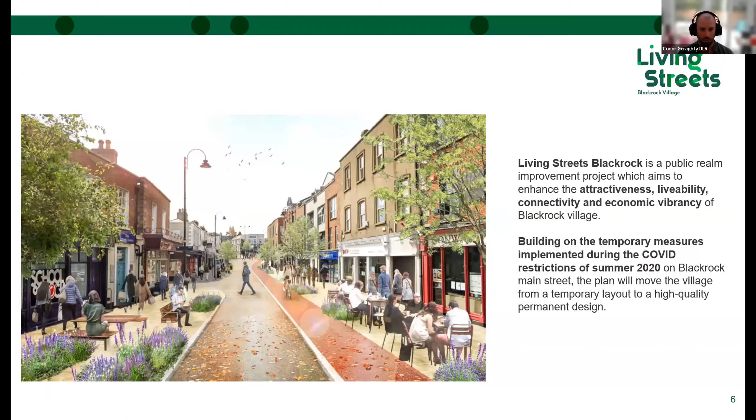This scheme involves a number of different elements. There are public realm improvements which incorporate better landscaping, more planting, and seating throughout the town, not only along the main street but out into the wider area as far as Frascati Road and down towards Newtown Avenue. It's hoped this will create a safe, accessible and attractive environment that will help maintain and boost the economic vibrancy of the town.

We hope to expand the mobility options for the town. While Blackrock is already quite easy to cycle to, we want to further expand the network and connect into the coastal route with a new facility along the old main street, improving walkability and accessibility in the town.

With the response to COVID measures, there have been a number of step changes across the town, and this scheme is looking to regularize that and bring consistency across the town, creating a high quality area.

As mentioned, connecting spaces is important to the project, particularly with the discussions around the seafront and existing projects in the area. We're trying to connect all of these spaces, and this project lies in the middle of all of these schemes, so it's important that we consider that at this point.

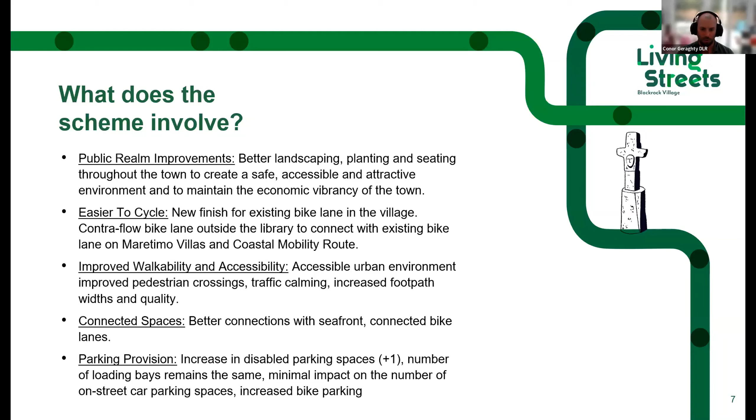Provision for parking is obviously important. There is an increase in disabled parking spaces in the town, and the number of loading bays remains the same. There is a loss of parking, but it's minimal in comparison to the amount of additional features included in the scheme.

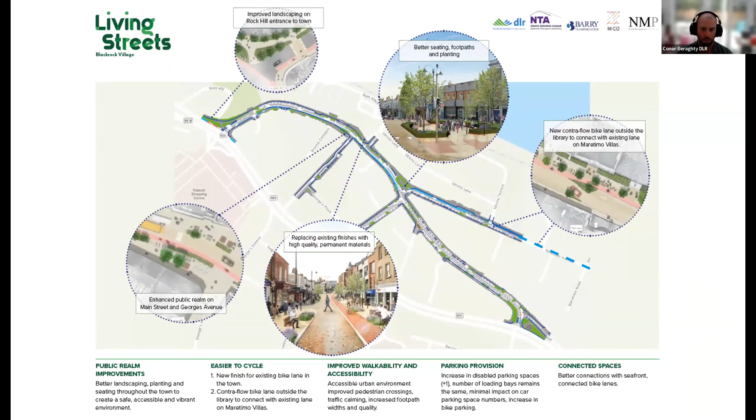On the right hand side, the continuation of the contraflow facility completes the link and connection to the coastal mobility route. The two images at the bottom are some representations, and John will go through these in more detail shortly.

The benefits to the scheme, which I've covered already, include improved walkability and accessibility, making it easier to get to the town by sustainable travel modes, connecting spaces, improving the green in the town and landscaping in line with our climate change objectives, and enhancing community well-being as well as the vibrancy of the town.

In terms of the history of the scheme, there's a strong policy basis as far back as 2015 when the local area plan was adopted. Even then, that plan identified the need for streetscape upgrades, active travel mobility, and enhanced connectivity.

The first step on this journey was rolled out during 2020 in response to COVID. One of the most significant changes was making the street one way, which freed up space to provide other measures like the contraflow cycle facility and increased planting. This was developed in consultation and co-designed with BBN and BVRAG at the time.

In 2021, TU Dublin carried out an independent evaluation of the Blackrock scheme to assess whether the measures put in during COVID had a positive impact on the village, and if so, what should be done next. That evaluation established that the scheme was positive and should be retained but built on, and that's what we've been working on through 2022 and so far in 2023.

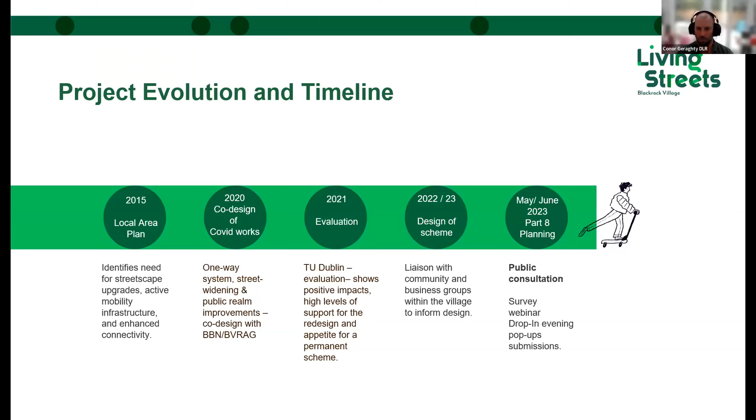At the moment we are in a public consultation process under the statutory Part 8. This webinar forms part of that engagement process, and the next steps would be to report back on the consultation for a decision to be made by the elected members.

Within the existing local area plan, there was a need identified to upgrade the public realm on the main street to provide a more attractive streetscape and an improved pedestrian environment, and this project seeks to achieve that.

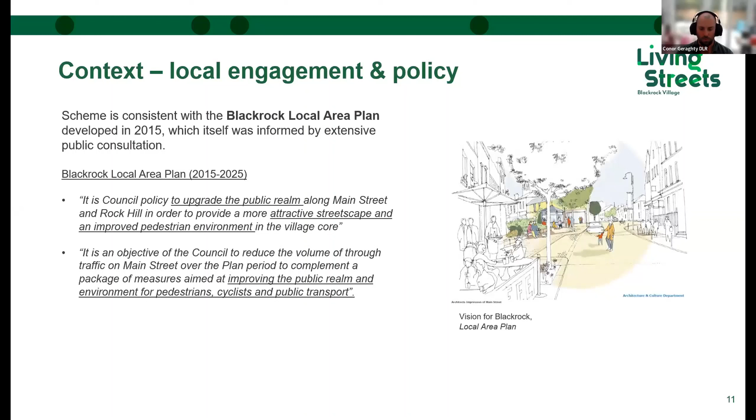It was also an objective to reduce the volume of through traffic, and the measures provided during COVID achieved that. There are a number of other projects in the area, the seafront project and Bus Connects, which sit either side of or through this project. As part of our scheme, it was important from the outset to make sure these schemes could all work together, in particular the need to move the bus terminus from the existing space near the seafront to progress the seafront project.

As part of this scheme, we successfully negotiated an alternative space for the bus layover facilities. While we don't need to move the buses at this stage, having that agreement with the NTA facilitates the progression of the seafront project.

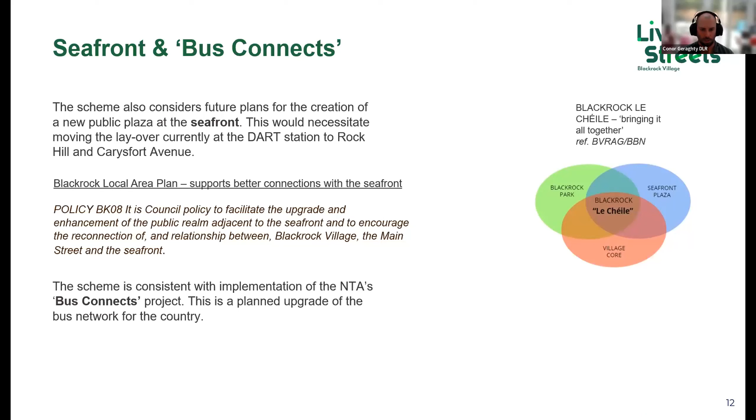The Bus Connects scheme generally has two parts. There's the change of services, the numbering and frequency of buses, which is facilitated within this project. Then there's the wider Bus Connects scheme, currently with An Bord Pleanála, which deals with the Rock Road down as far as Merrion Gates. This project aligns with that scheme as well, and the three projects work well together.

The TU Dublin report assessed the measures put in during COVID. The highlight findings were that 84% of residents surveyed believe the main street was good for the village, and 72% of businesses would like to see the changes made permanent. We took that support as a mandate to prepare the Part 8 for this scheme.

43% of those surveyed would like to see some design changes, and the recommendations from that report have been incorporated into this scheme. Loading and deliveries are a key issue for businesses, and during our discussions we've been mindful to incorporate those needs as part of this project.

Before the Part 8 was proposed, we had a number of workshops, both internally in Dún Laoghaire and externally with the National Transport Authority, who are the lead authority in relation to bus routing. We also met with the Blackrock Business Network and the Blackrock Village Rejuvenation Action Group, discussing what they need or would like to see in the village, as well as the schemes in the wider area and these objectives and needs.

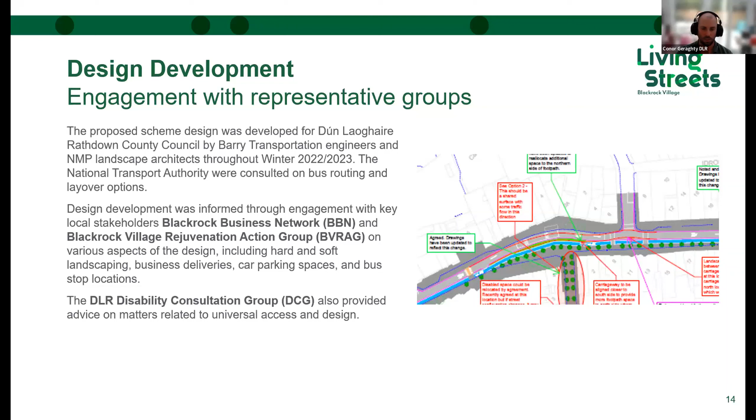We've tried to respond to these as best as we can within this Part 8. We also met with the DLR Disability Consultation Group to talk about matters relating to universal design and accessibility, and needs for those with disabilities within the village.

At this point, I'm going to hand over to John Montgomery, who's the lead landscape architect for the project, and he's going to talk through some of the design features of this scheme.

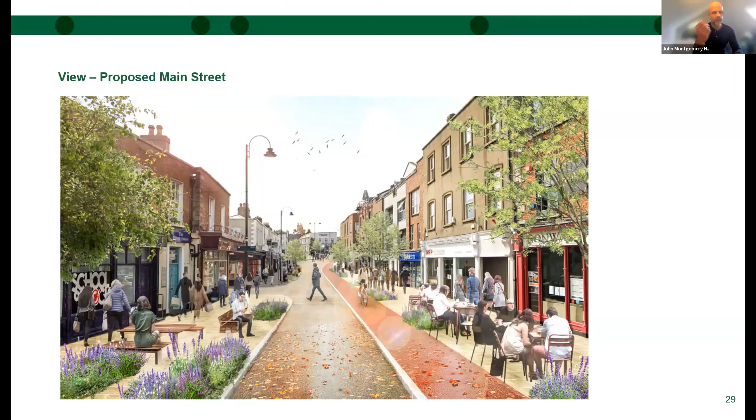We're really utilizing opportunities for providing planting in the streetscape itself, which will soften up the spaces a lot more throughout the year. You can see from the visual that it's much softer, less gray in the street, more green evergreen planting to complement and give structure to the herbaceous perennials we're mixing in, which will also help with pollinator plants selected for the scheme. That's just a plan view of how that works.

Currently there are 2 car parking spaces in this zone, and what we've done is realign the road to create more space. This is the zone just outside the parlour on both sides of the road, really taking advantage of the sun and aspect here. There's provision of bike parking, which is currently there, plus additional bike parking for cargo bikes, and we're protecting these edges using planting in the landscape—so it's a very functional tool as well as an aesthetic driver.

The loose seating is indicative and will require further thought on how it gets laid out and agreed. Again, the detailed plans are available to be viewed.

The space outside the bank itself is currently very well used, with seating and planting there. What we're doing here is celebrating that square and allowing for flexibility, while being conscious of creating a space that's well protected from the road itself, still provides a focal point within the village, and has seating around the edges that gets utilized as well.

We've allowed for clear width and access along the side, so people can move around the edge of the space if they don't want to go through or permeate it—based on feedback from various user groups. There's additional bike parking along the edge of the path, and we still maintain clear widths adequate for wheelchair users, buggies, and less able-bodied people to move through the space.

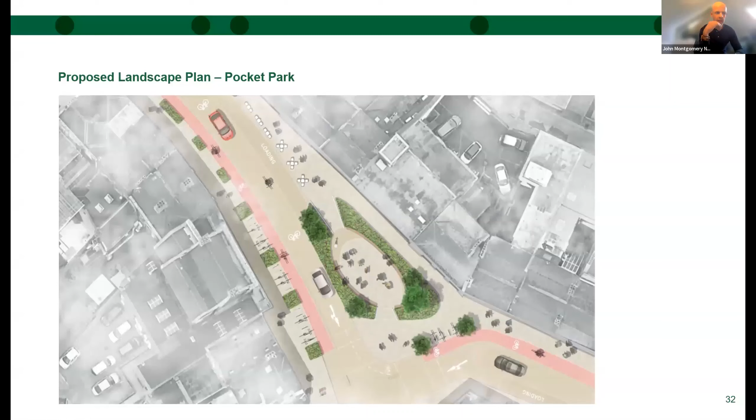In addition, the space is approximately similar in area to what it is currently. We're retaining the stone cross as well, trying to create a space that's safe and away from the noise of the actual street itself.

The visual I'm showing still needs a bit more work, but there have been comments about the existing trees—trying to retain the existing birch trees, as well as the clipped hedge close to the edge. These are details that will flesh out as we progress with the scheme. But the design intent is clear: creating a space that's a bit lower down, away from the traffic, feels enclosed and safe, playing a different role in that sensory experience of the landscape.

You still have controlled crossings through the space to link you beyond, really celebrating the idea of planting and the existing trees there, which tie in with the buildings.

The final space we'll look at is outside the library itself. Again, understanding how the space is used at the moment, and trying to utilize those spaces as a catalyst for that vibrancy we were talking about. This includes celebrating the entrances into the library, utilizing some of the space directly outside with soft landscaping.

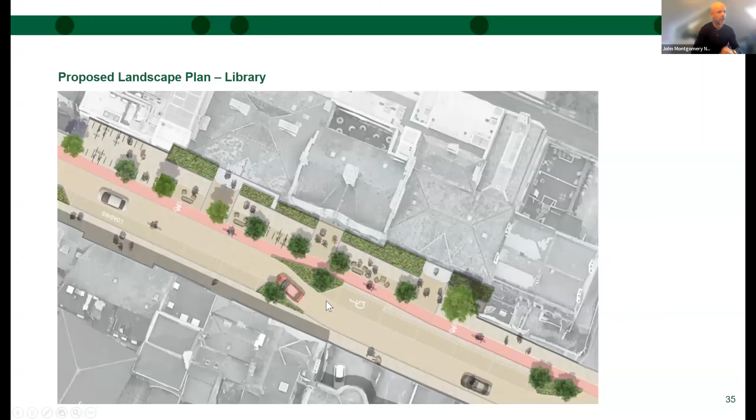This gives a better interface between the ground plane and the library building itself. There are opportunities for seating within some zones, still providing a safe transition through the space for pedestrians - a transition zone, static zones, and integrating the bike path. We'll still retain the car park spaces outside the library and mobility impaired spaces also. And again, the detailed plans can be referred to.

In terms of details, typically we'll be looking at natural stone, a very warm granite paving, very similar to what's been put in Monkstown and also along the metals in Dún Laoghaire. So it's the same suite of materials that we're using.

We'll be looking to detail the cycle path itself. In some instances it's flush, which helps slow down bicycle traffic. In other instances we keep it away from the actual road in both scenarios, giving greater safety to cyclists, particularly those traveling with young children. The high friction surface will be utilized on the bike track itself as a red color.

We'll also be using a high friction surface through the village for a portion to help with that sense of a shared space, but also to provide a much warmer feel than the blacktop currently there. We have an edge to the buildings which will help tie in those difficult nooks and crannies using smaller, darker paving setts, which also helps pick up or screen against any dirt.

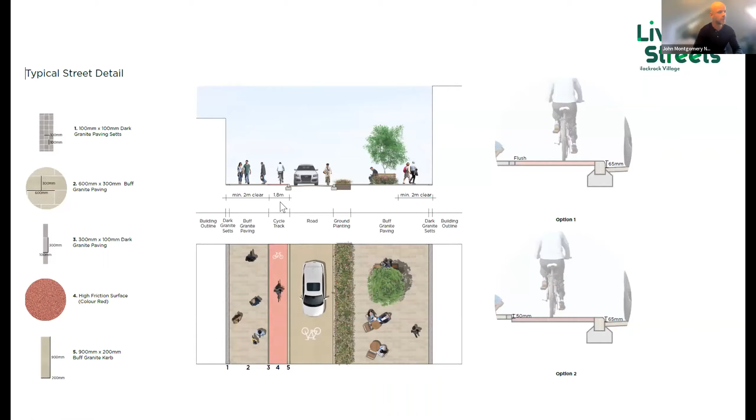This is just a little more detail on those actual materials, so you can see that kind of warmth coming through the granite. It's very durable, and it's been well tested elsewhere as well.

There's been questions about the edges of the planted areas - can they be slightly raised? In some opportunities we will be able to use raised planters, like in Monkstown and across the metals. In other areas, where we're trying to encourage water into the planted areas to use them as filter systems, we'll use lower kerbs with holes in them to allow that process to occur naturally.

For benches, we'll be looking at something more in keeping with what's been very successful in other schemes throughout the county. And obviously bike stands and the opportunity for an outdoor drinking water fountain.

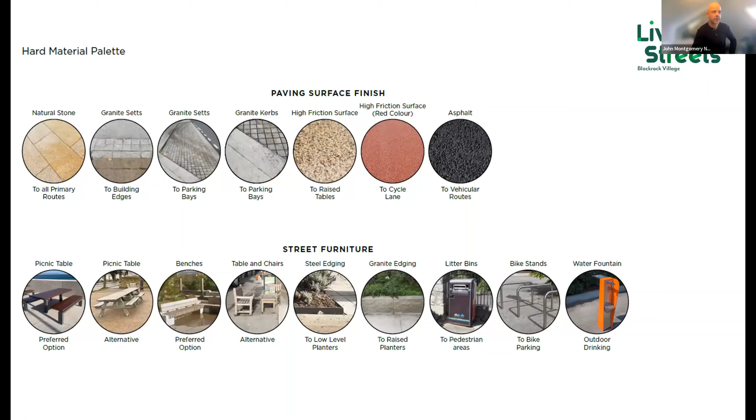In terms of the palette of materials for soft landscape, we'll really be looking to utilize native plant species, both in the trees and also with the selected shrub planting in the lower areas of the planters.

For bike parking, as we touched on previously, the preference is for Sheffield stands. Obviously there's issues with lower bike stands and the damage they do. But in total, we're exceeding what's currently in place, which will help encourage people to cycle to Blackrock and lock their bike safely.

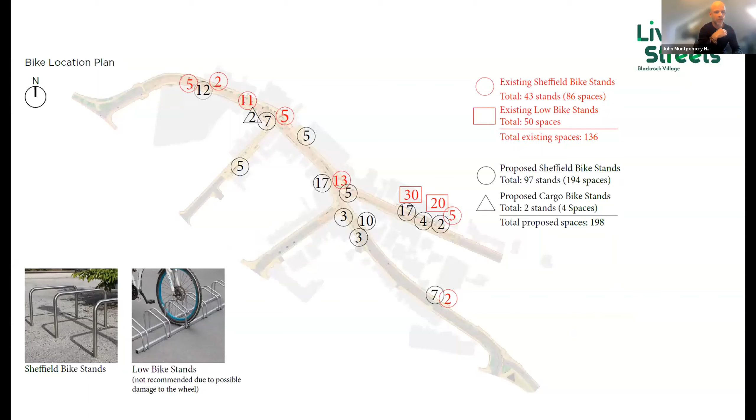Bike parking has been distributed in higher concentrations in certain areas where people are using it more, and lower concentrations in other areas, but always trying to ensure it's surveilled and safe for people to lock bikes to.

So in summarizing some of those elements, we've had good engagement with some of the user groups. We're looking to reduce clutter and obstacles, such as A-boards and signage, avoiding unnecessary regulatory or informational signage. There will be defined areas for retailers' furniture like tables and chairs, so they can be kept neatly out of the way without creating obstacles or zigzagging points for many users, including people with buggies and wheelchairs.

The opportunity for tapping lines for visually impaired, contrasting materials at thresholds, be it curb lines, crossing points for tactile paving, or actual thresholds into buildings. Looking to incorporate additional drop kerbs, again for the mobility impaired but also for other users. Smooth and clean non-slip surfaces, so all of the surfaces we'll be specifying will be aligned with the various different standards we're required to meet. Again, tactile contrasting paving at crossing points, and then the disabled spaces which will be retained.

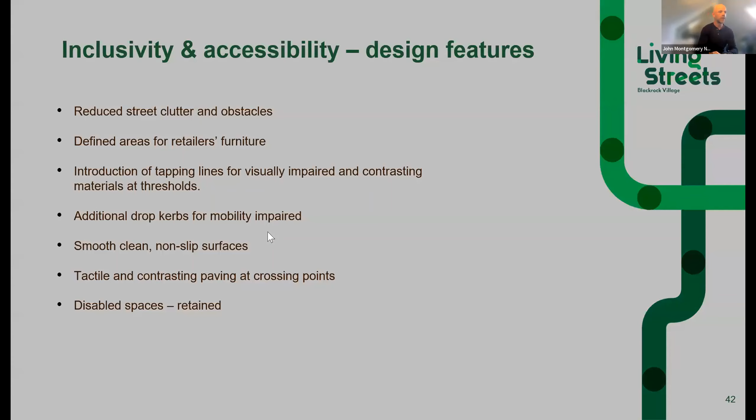Thanks so much John and Connor for giving us a good overview of the scheme there. As Connor said, we are in the middle of our public consultation phase at the moment. It's a Part 8 public consultation, so that's a 6-week process. The survey has been up since the 28th of April and it is online now at the link we shared, and we can share that again in the chat on the Citizen Space website. We held a drop-in last week in the Blackrock Library. We've the webinar today, which will go as a resource online, and we're holding another pop-up in the village next Wednesday, which will be talking to people on the street about the project. So really trying to build awareness and engagement. We sent out flyers to over 9,000 households. We're trying to get posters up. So it's great to have you all here, but please do spread the word.

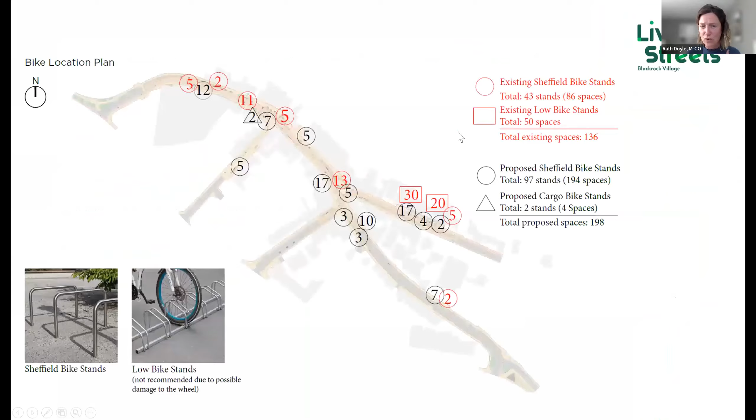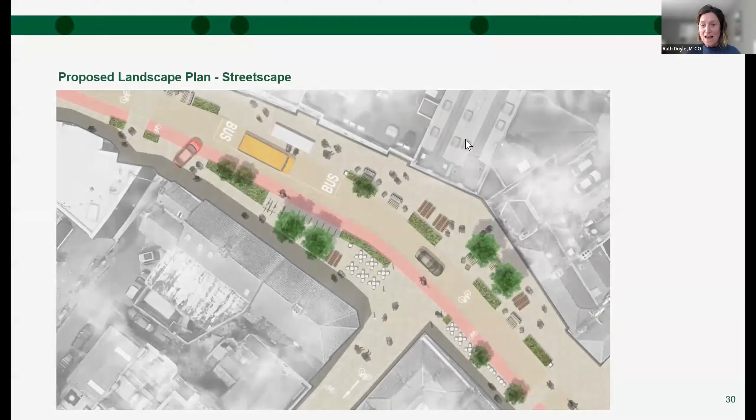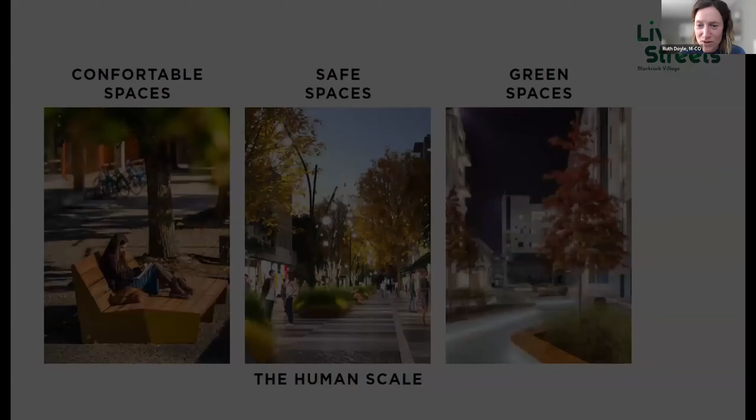Thanks, Connor. There was another question about the bus terminal, probably for you or Rory, asking where the bus terminal would go. I think the question was around if the Seafront Plaza goes ahead, where would the bus terminal that's currently outside the Dart station be moved to? I know the plan is for it to split between Carysford Avenue and Rock Hill - I think that's what the question was about, so you might give a bit more detail on that please. Yeah, I can take that, Ruth. If you want to go forward maybe 2 slides there - I think it's probably a more blown up version, slightly better, whoever is sharing at the moment. The other way, John, you're sharing there. Which scheme are you looking for? The first, I think it's slide number 2. I can share here. Yeah, so it's the next one. That's the one. So what's shown on that slide is the provision for the 2 bus bays. There's a couple of things to note.

What we've reached is agreement with the NTA that the bus terminus and layover spaces could be moved from the seafront, but they don't need to move until or if the seafront scheme goes ahead. So for the moment where we've shown those 2 buses, they would just be normal parking spaces, but we've included in the geometric design of the street that that's where the buses would go.

It's quite hard to get context in that photograph, but the grey area to the top is the end of the Deepwell property. On the northern side, adjacent to the wall at Deepwell, is where those 2 spaces are shown, and there's facility for a 3rd spot on Carysford Avenue, but that would only be required if 2 buses laid over and needed a 3rd spot, which we don't think would be very common. So even though the buses are shown there in the Part 8, the intention is that it would just be parking until it's needed in future. They will continue to use the seafront in the short term.

Okay, thanks a million, Conor. There was a question then, linked to the construction question, which was when would you start building it, if this is to go ahead, when would it happen?

The current programme is to bring the report back to the elected members at the July full council meeting, and assuming a positive outcome at that point, we would move to detailed design. Detailed design, depending on the complexity, could take a number of months or even up to 6 months, and then there's a tender period.

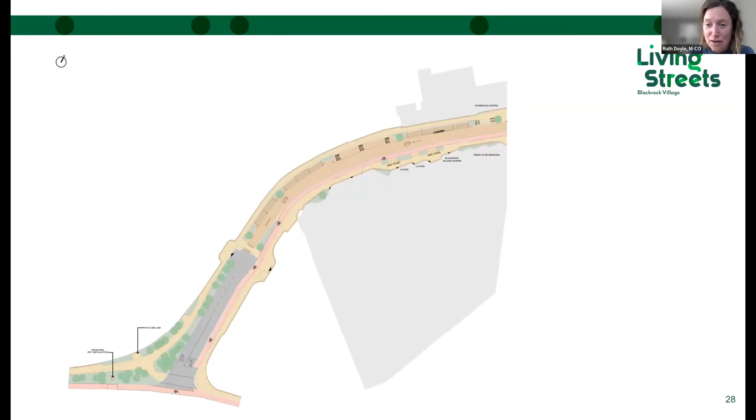I'm putting the link there again to the Citizen Space website, and within that page, if you click down the bottom, there's a link that says give us your views, and that's where you get through to the survey itself. You might take a bit of time to reflect on what you've heard, it's quite hard to formulate an opinion straight away. So take a bit of time, go back over your notes from the webinar, and make a submission online.